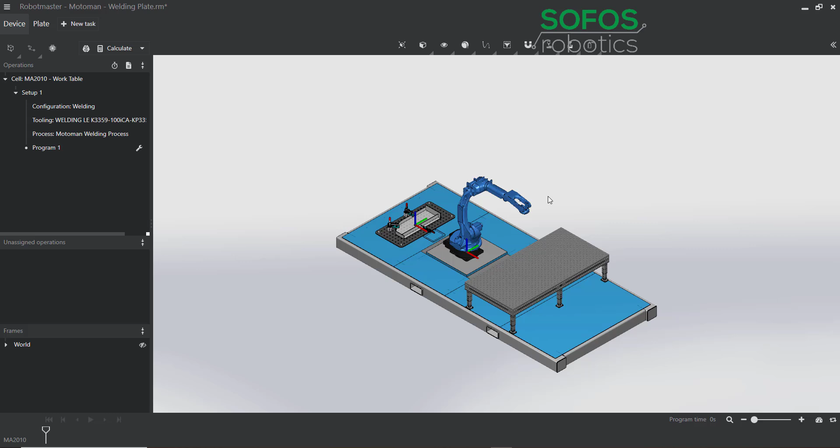Over on my device side, as an example, I'm just going to use this MA2010 by Yaskawa, but this works with Fanuc, Kuka, ABB, UR, all different kinds of robots. And to import this part, I just clicked on this plus icon and it will open up your file explorer and you can go and select your part. Now that I have my part loaded in, I can go ahead and add an operation.

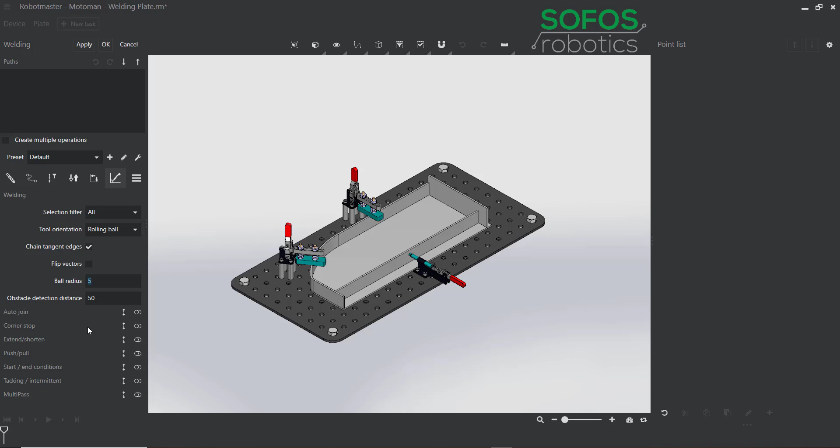And now we'll select welding. When you click on the welding module, you can see that you're going to get these icons across the top here. These first four are common across the contouring module, the surface path module, and some of the others. So really the items that I want to focus on in this video are going to be specific to welding. I'm going to click on this welding icon here, and it's going to bring up this menu with some of these different options that are specific to the welding module.

The latest way that Robotmaster has decided to find joints that I really like is they have this rolling ball method. You can see when I hover over a weld seam, up in the top left corner of the viewport, there's a green ball, and it is finding where the walls of that joint touch it and creating a bisecting angle.

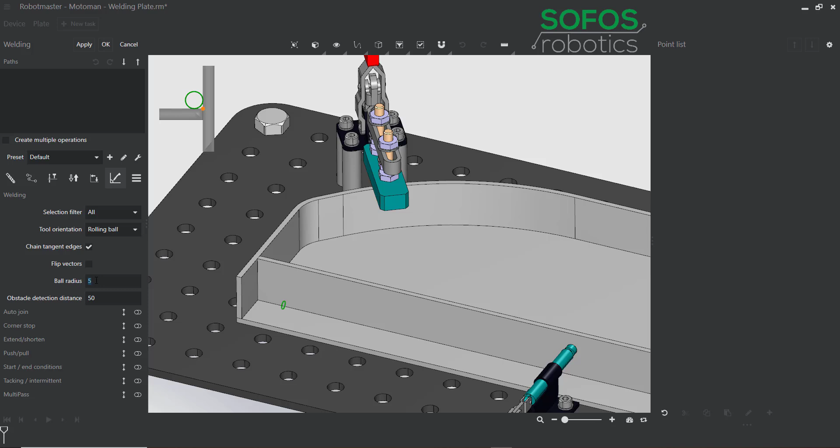And the reason I like this is because you can expand or shrink the ball radius to fit your gap. So even if you have a CAD file where the weld joint has a gap, you can expand that ball radius and it will still find the bisecting angle for that joint.

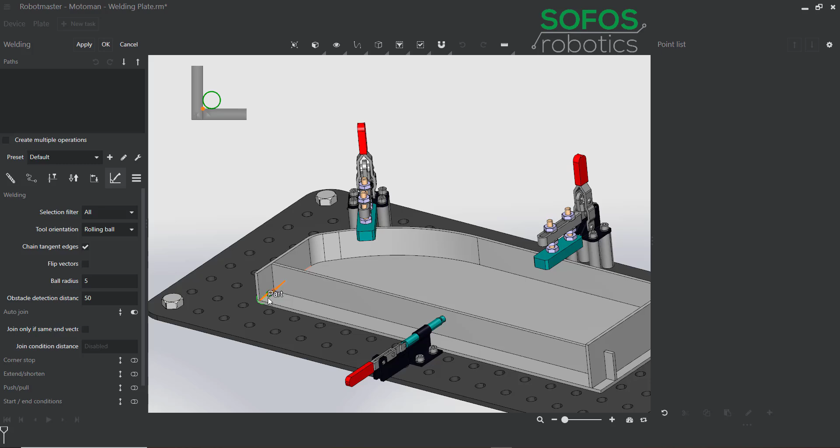From there, I'm going to go down and start showing some of the weld module specific options, starting with auto join. To turn these options on for the path, you just click this toggle switch and then you can expand using these arrows. So for auto join, if I wanted to weld around a corner, like right here, you can see when I first click that path, I have one weld path up here, but then when I add this second path, it adjusts this vector so that I can weld through that in one continuous motion.

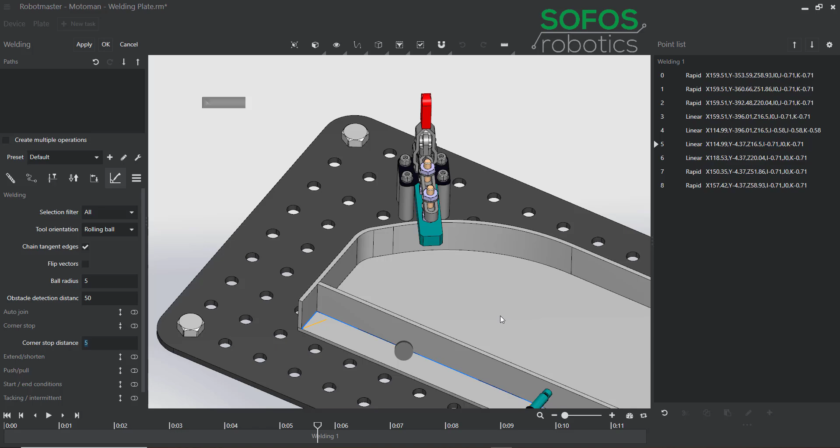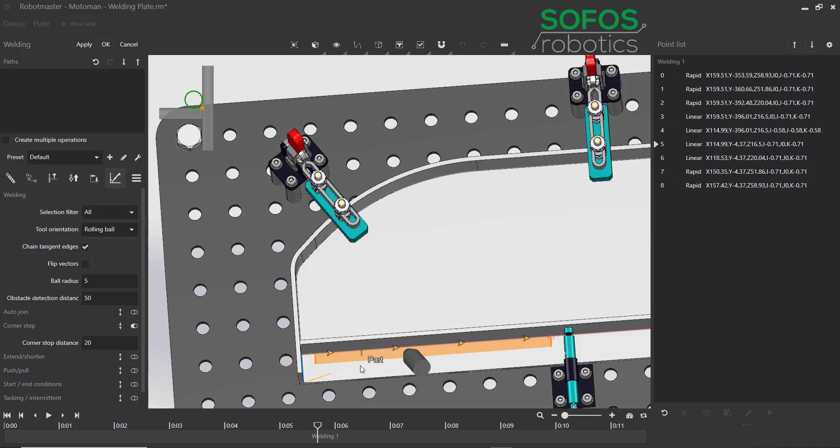After that, we have corner stop, and what corner stop does is it automatically detects the wall here and the clamp here, and then stops the tool path within a certain distance in millimeters. If I reorient before I turn this on, you can see that we're going right up to the wall and right up to the clamp. If I put in a 20 millimeter corner stop distance and turn this on, now it's detecting the wall and the clamp, and shortening the path to avoid those obstacles.

Extend shorten is a more advanced version of the corner stop because it allows you to extend or shorten the path at the start or at the end. So for instance, if I wanted to extend the start, let's say I do 25 millimeters here, and I wanted to make the end of my path shorter, I could do -10. Then you can see at the beginning of my path, it's extending at 25 millimeters, and where the clamp is, it is reducing the path by 10 millimeters.

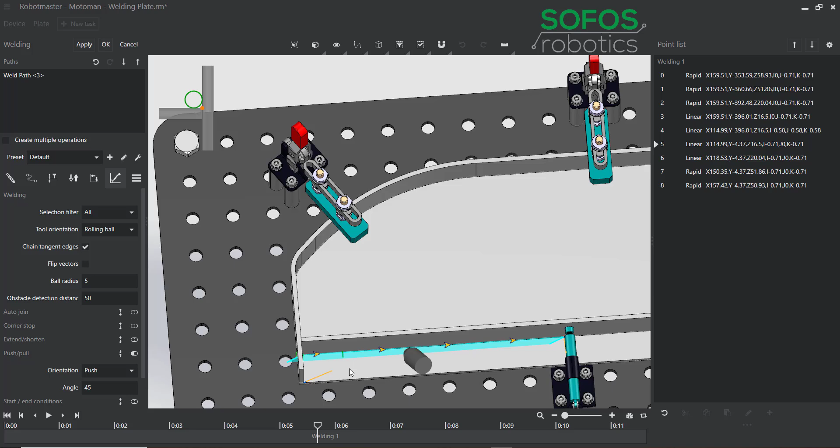Push-pull. This allows me to select a push or a pull orientation as well as a degree for what I want that to be. So you can see here, if I do a 45-degree push and I hit apply, it's going to put that orientation on all of the points in that weld path.

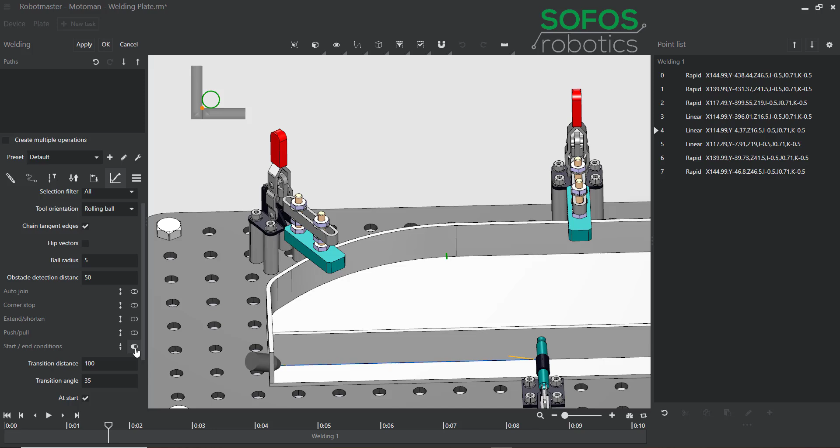The next one we have is start and end conditions, and this is one of my favorites, and it tends to be one of our customers' favorites as well. What this does is it will detect the wall and the clamp, and it will allow the torch to go in at an angle so that we can avoid collisions with the nozzle. So we have the transition angle, which is the angle at which the torch goes into the weld seam, and the transition distance, which is how long it takes to get back to the ideal weld position. If I click apply here, you can see we're coming in at a 35-degree angle, and it's taking us 100 millimeters to get back to this normal position here.

And I can adjust this if I want to get back quicker. I could say 50 millimeters. And then when I program this path, you can see it's going to pop back up pretty quick. And 50 millimeters away from that clamp, it's going to start that sweep as well.

Next we have tacking or intermittent welding. This is broken up into two different tacking modes: distance and fixed number. I'll go through distance first, then fixed number.

I'm going to turn this on to activate it. I'll set my weld tack length to 10 millimeters and the distance in between my tacks to 50 millimeters. Now it's set up to go a 10 millimeter tack, and from the end of that tack there will be 50 millimeters before the start of the new tack weld. If I wanted to use a center to center reference, I could check this box right here.

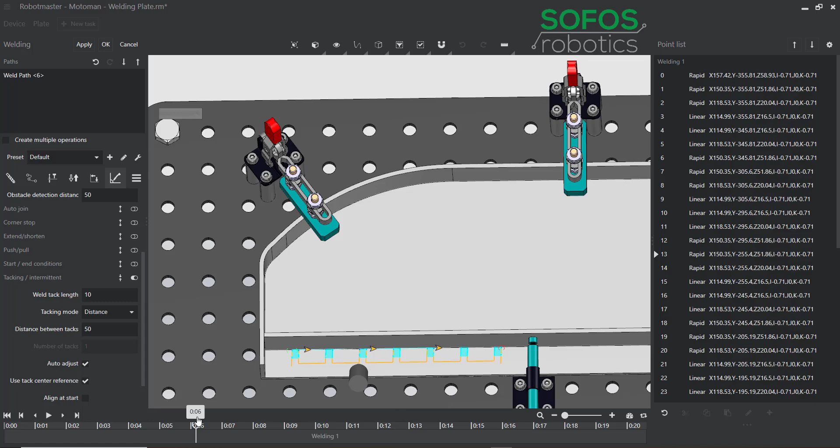One thing I like to show off with this as well is the approach retract. If we look at this weld path, we probably don't need to come up this high in between each pass. There's a menu here where I can specify how many approach and retract moves I want. So let's say I do my clearance move, I'll make that linear, and then I just want to go straight from my clearance into my welds.

So I have an option here to use it only at the start and at the end of the path, so it would be here and here. I'm going to check that. For the weld paths in between, it's going to pull back to this feed height, which I'll set to 10 millimeters. When I hit apply, you can see we have a nice clearance move, and then we're just pulling back to whatever we set our feed height to until we get to the end of the path, and then we'll do the full 60 millimeter retract.

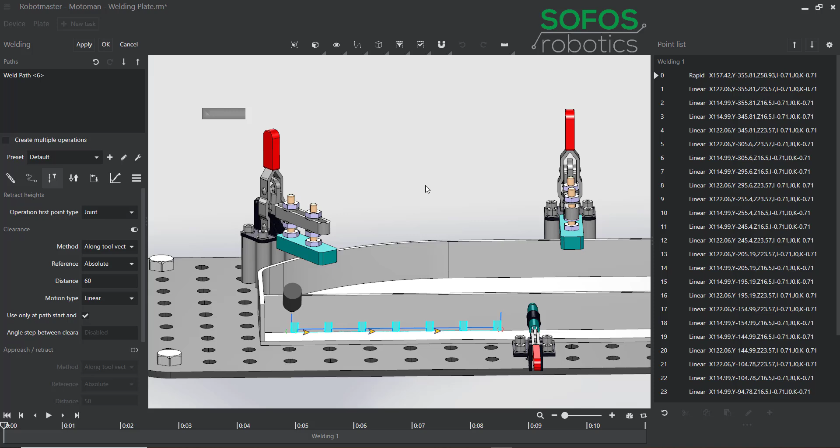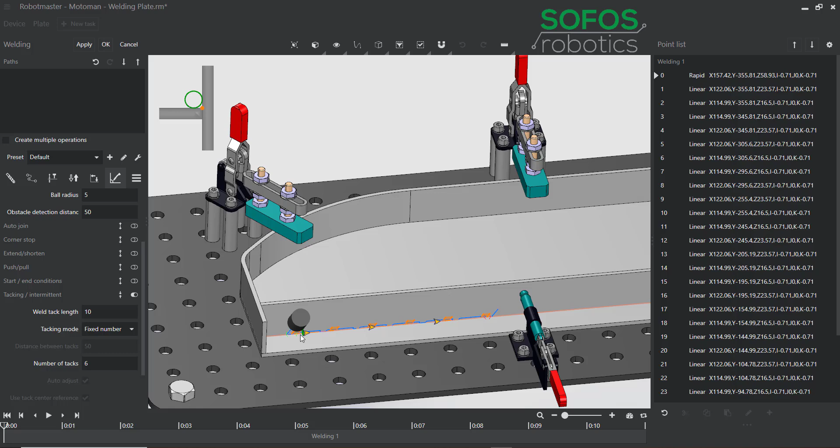So that was distance. Now I'll go over fixed number. Fixed number allows us again to put in a weld tack length and then how many we want. So if we want 6 welds, I can just put in 6, and you can see it's going to give me 6 10 millimeter tack welds there.

Down below I can align these at the start if I want to, or I can align them at the end. I can also make sure that I have a tack at the start and at the end, and it will space them accordingly.

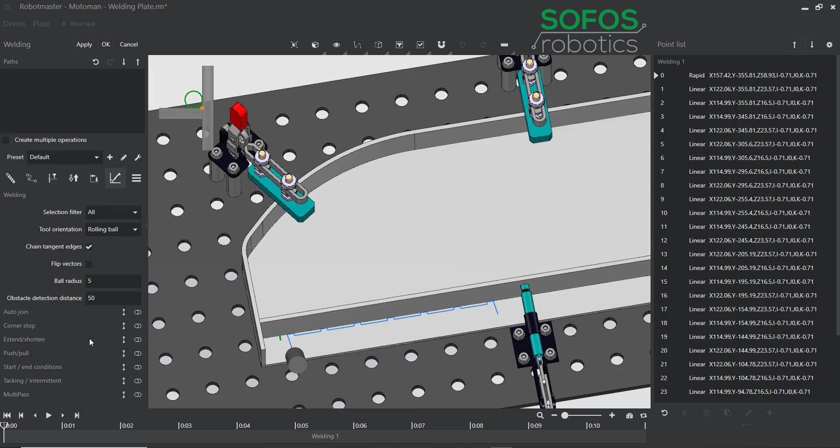After that, we have multipass. The way multipass works is it will program a root pass and then 2 passes on top of that, 3 passes on top of that, and so on as you add layers.

You have a couple different options here. This Z up order indicates, after the root pass, whether we want our second pass to be on the wall of the part or on the floor of the part. Then we have the option to keep the same direction.

What this would do is create the weld, retract, come back to the start, and do the second weld, retract, come back to the start, do the third weld. If we uncheck this, then it would do a zigzag motion where it welds one way, then welds back the other way, and so on.

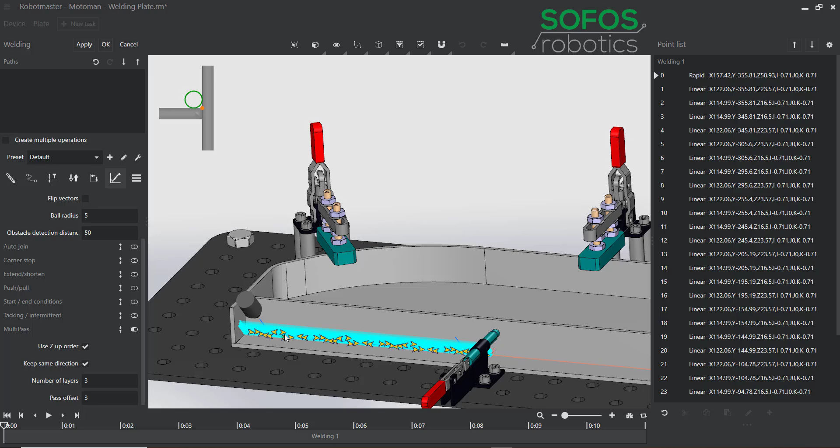The number of layers here determines how many welds this puts down, so for 3 layers it's going to put down 6 welds. If we zoom in here, we can see it's a root pass, then the second layer, which is 2 welds, and the third layer, which is 3 welds.

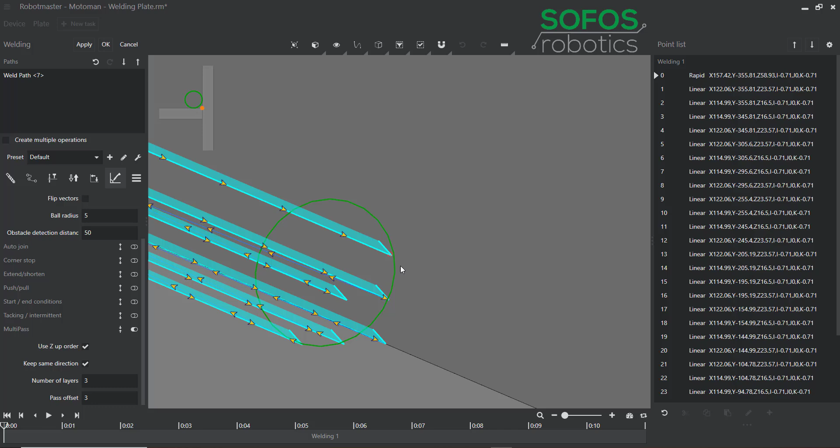The pass offset in millimeters is how far away from each weld it needs to be. So this would be 0, this would be 3 in X, this would be 3 in Y, and that just plays out over the course of the whole multi-pass weld path.

So those are the specific parameters that we can use to program. We also have the auxiliary menu, and this is where we can set our arc start and arc end files, as well as our weaving files. So if we have a weaving file number that we want to call, we can also call that from Robotmaster, and then seam tracking parameters as well. So this will all be natively output from Robotmaster to your robot if you're using these functions currently.

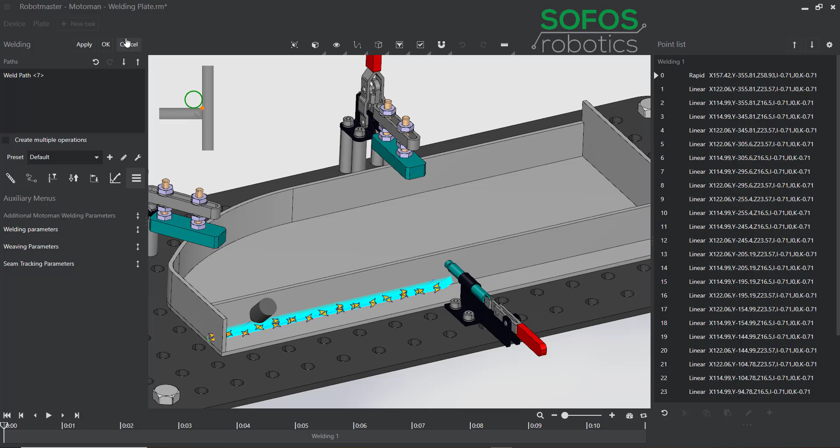The next thing I want to go over really quick is touch sensing. There's two ways you can do touch sensing. You can do it embedded with the weld program. So if I come in here and do welding with touch sensing, it's going to ask me what method I want to use, wire or nozzle, and then the order that I want to do the touches in and how many touches I want to do.

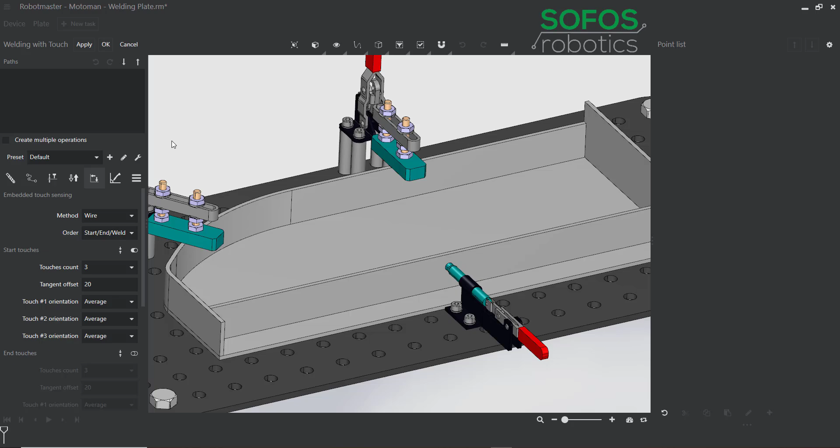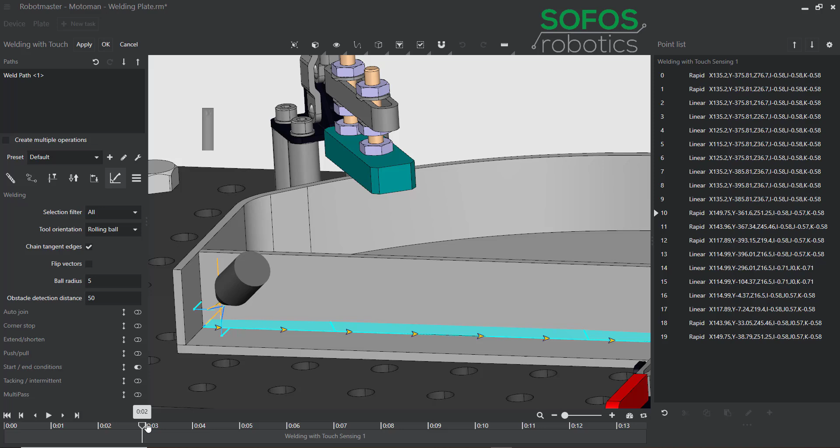So for instance, if I keep it with this same path, I'll turn on my start and end conditions, and you can see when I program this path, it's going to automatically program in those touches as well. It'll come in, it'll touch, touch, touch, and then it'll do the weld. And it'll output these search functions and these offsets for the program as well. So that's one way to keep it specific to the weld.

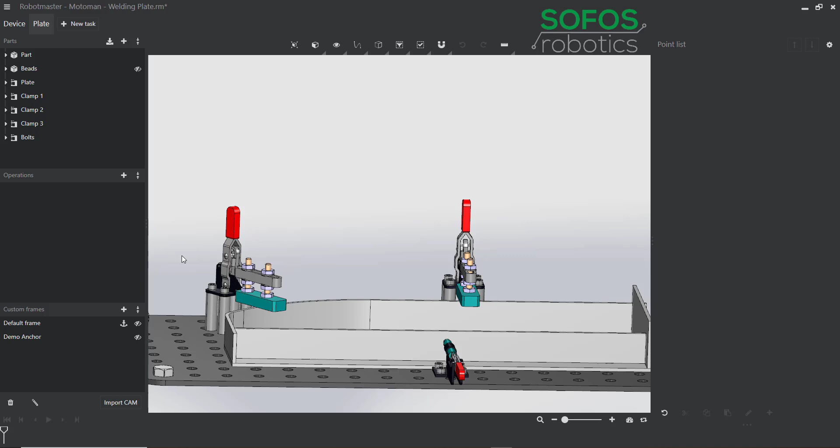Another way I could do it if I wanted a more global touch sense is I could come in here and create a touch sense job. So for instance, I could come in here and touch here, and you can see it's automatically programming in those touches with this distance of 20 millimeters, and it's reorienting those touches.

So now that I have this created, I have a touch sensing 1 job, and when I come in here to open a weld job, I can go to the touch sense option, and I can reference that touch sensing 1 job that we just created. And this would allow you to create one touch sense routine and then take that touch sense job and apply those offsets to multiple different welds.

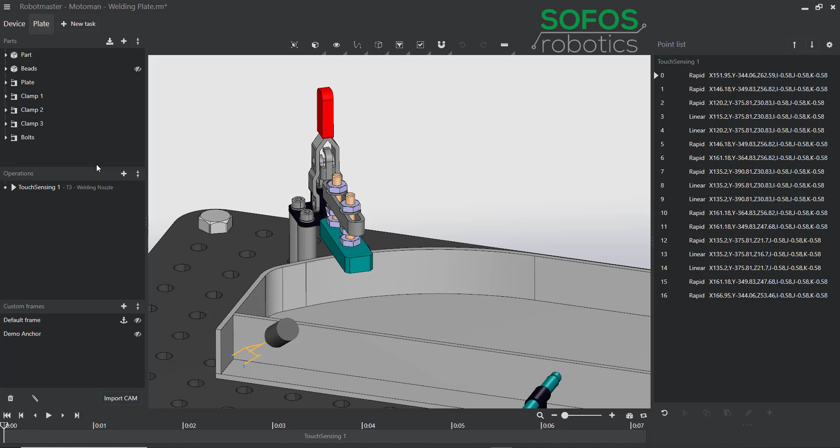So I'm just going to go ahead and delete this, and I want to program this up really quick just to show you what a workflow for programming this part would look like. I'll go ahead and program this weld, and this weld around here.

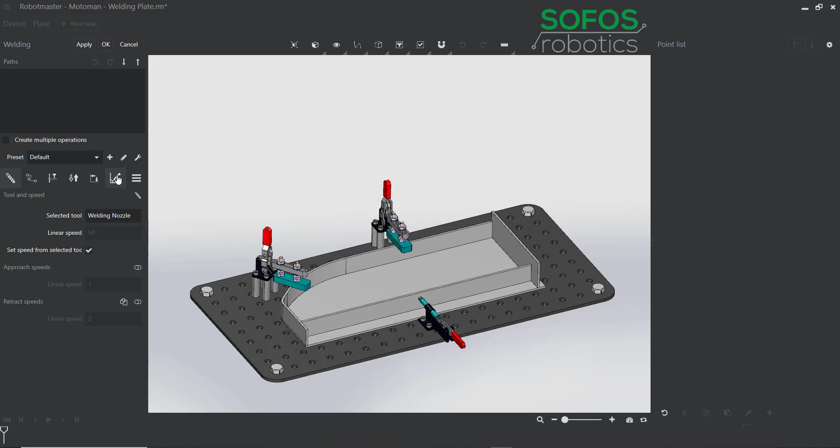So I'm going to go to welding, and for this first one, what I want to do is just use the start and end conditions here. Go ahead and click that and hit OK. Got that weld. I'll do this one really quick with my start and end conditions.

And there's also presets that we can set here. So I could come in here and add start and end conditions as a preset. I have a last used settings, so if I hit override, you can see it's going to use my last used settings here as well.

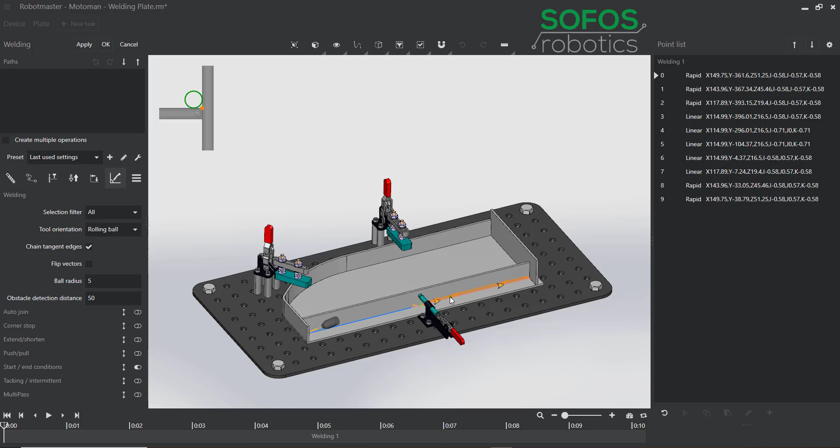And so you can set up presets for operations where a lot of these different welds use the same parameters. So I'll come in and do this weld here, and I'm creating these in separate weld paths so that I can more effectively control the transitions. So again, if I go here, last used, override, now you can see my start and end conditions are automatically checked, and I'll program this weld here as well.

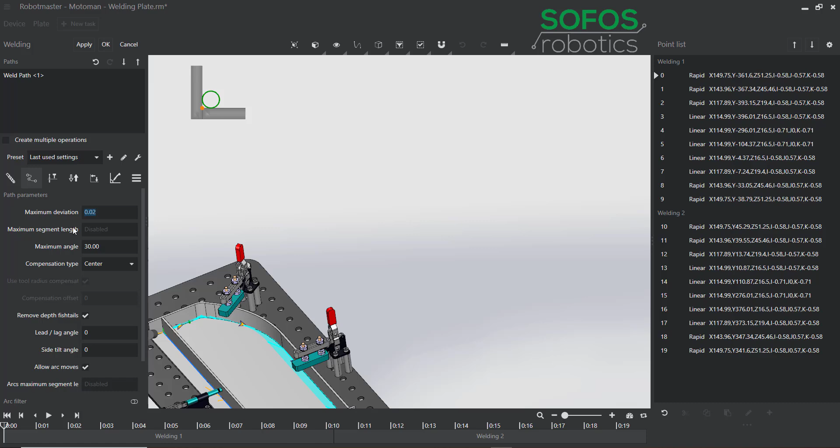And I'll hit apply, and now we have our 3 weld paths, and we can go over into the device side where we can start setting up how we want the robot to move, adding any transitions that we need to, and correcting any kinematic errors that we need to.

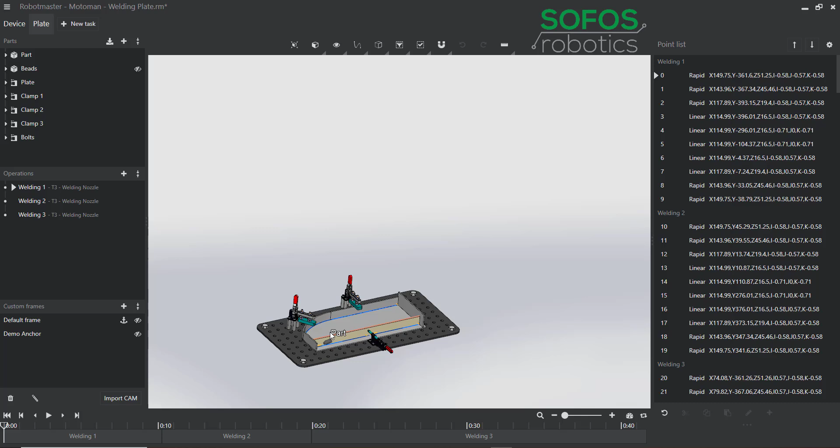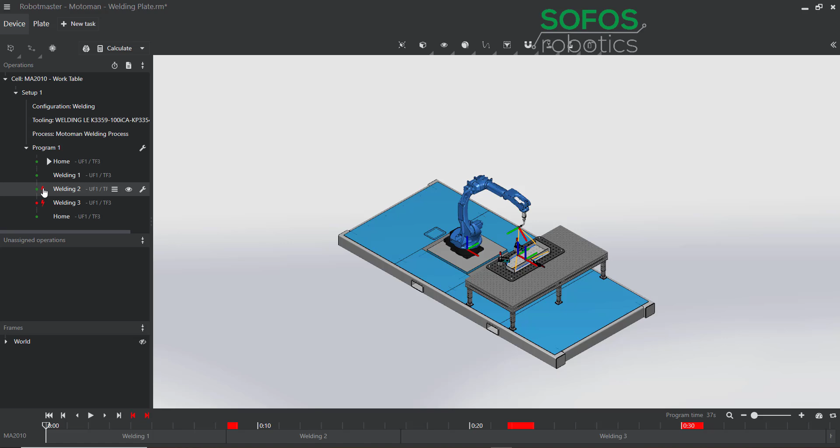So I'll go over here, I'll hit calculate, and you can see we are pre-processing all of these operations. So we know green means there's no kinematic errors and no collisions. We do have a collision, it looks like here. I can just click on it and it'll show me that collision.

Let me hide these tool paths so that it's a little less messy. And then I also have a collision here, so that's my clamp. So I'll work through my collisions first, and we'll go from there. And it's very easy to fix a collision here.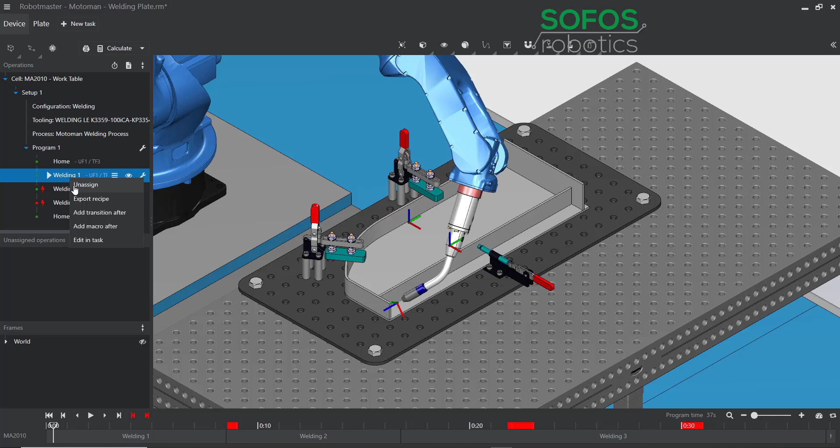So what I can do is right click on weld 1. I can go to add a transition after. I can go to manual transition. Let me delete these. And then what I can do is scroll through, and what I like to do is get this to a point where it's right in the middle of the collision that I'm trying to avoid. Something like this.

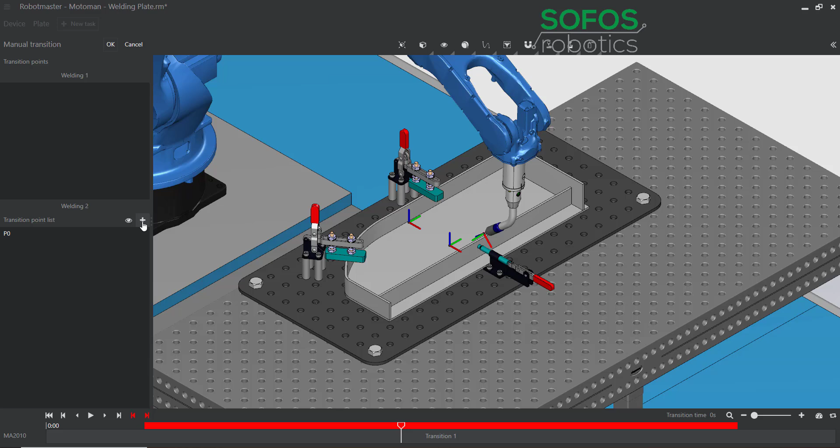And I can click on my torch, and then I can adjust my torch and pull it away from my workspace so that I can avoid that collision like so. I can add that point, and then I can inject that point into my current transition list here.

So I'll click OK. You can see we now have gotten rid of that collision by inserting that point.

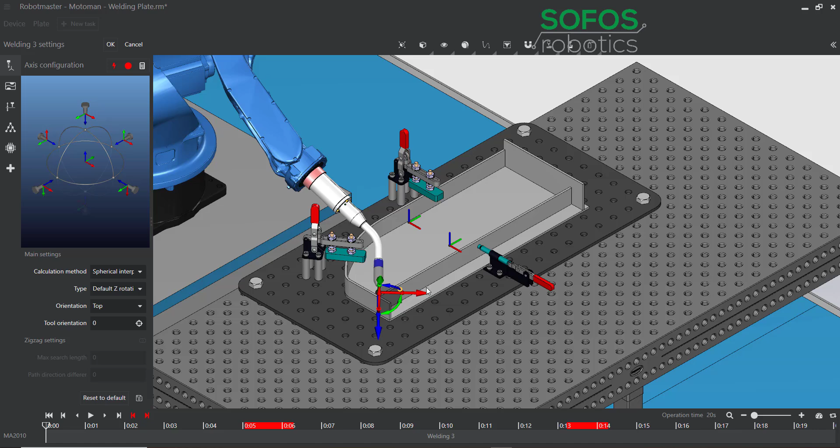And it looks like we have an out of reach here, marked by a red dot. I could set up a recipe for this, or save it as default, but what I want to do is prohibit the torch from spinning around the Z-axis.

So I'd really like that torch oriented like this, and the way I can do that is by locking the Z rotation around my torch. If I go ahead and do that and click calculate, you can see now we have a green dot saying there are no kinematic errors, so I can click OK.

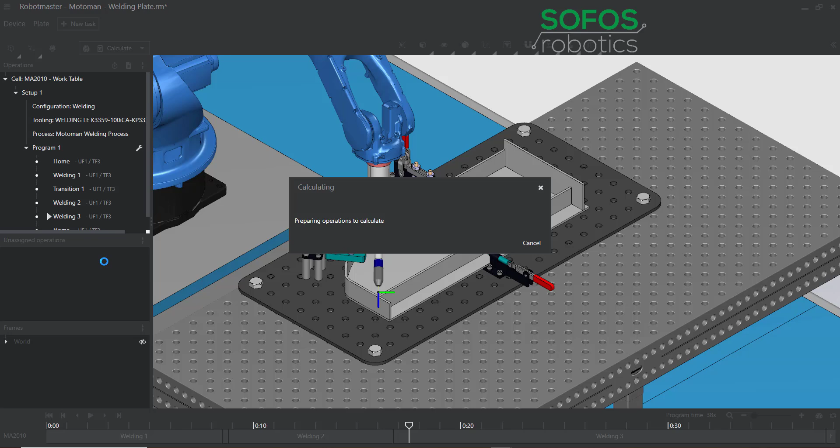Now we can see that we have a collision between the two, but our torch is oriented the way we want. So I'll quickly add a transition point in between these two operations.

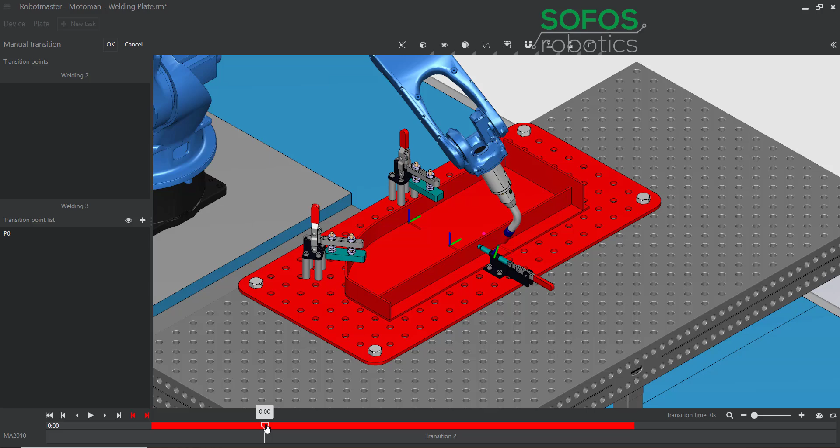I'll do a manual transition and slide it somewhere around here. I can click on my torch and move it out of the way, record that point, and insert it into my transition. So now our transition looks good.

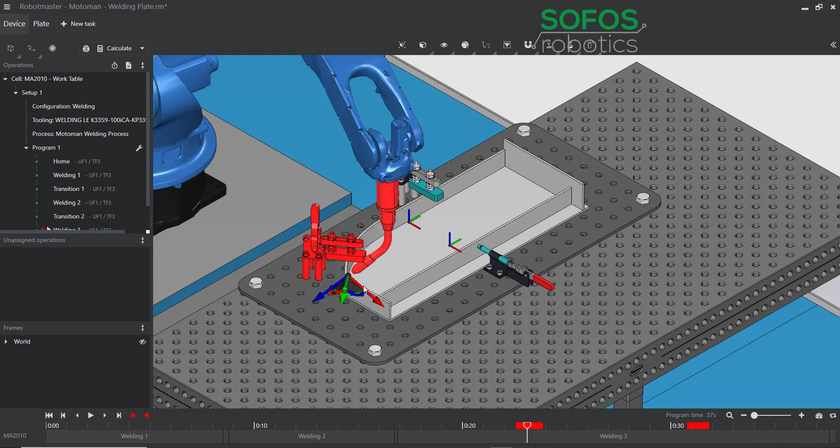Now what we want to do is weld around these clamps. Having experience with robots, I know I can click on my torch and it's going to give me this TCP, this tool frame. I've got blue as my Z-axis, green as my Y, and red as my X. And I know if I can just rotate around that Y-axis, I can avoid these clamps.

Robotmaster has come up with a very clever way to do this, and they call it optimization. When I go into the settings for this weld path, I can click optimization. It's going to default to spinning the torch around the Z-axis, but what I want to do is add a map, and I want it to be that TCP Y we were looking at. So I'll select that, give it a range of 20 degrees, click OK, and it'll be added up here as an option.

You can add up to 3 maps here, including external axes like linear rails or rotaries, whatever you want. You can use these 3 maps to dynamically try to find a solution for your robot that avoids collisions and any kinematic errors. As you update one of these maps, it's going to update the other maps as well, giving you a pathway to error-free programming.

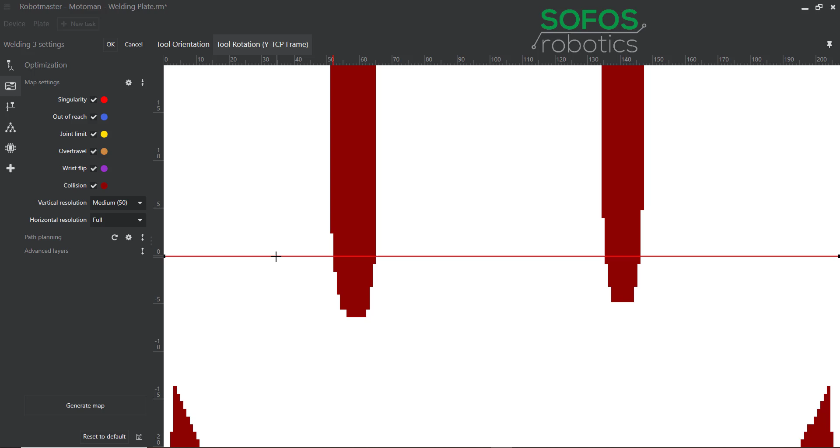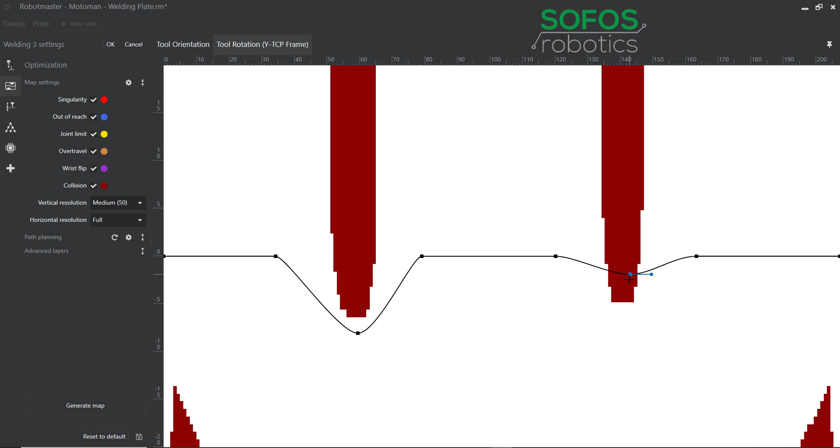When I generate this map, over on the left you can see everything we're checking for: singularities, out of reaches, joint limits, over travels, wrist flips, and collisions. Here's the first clamp, and here's the second clamp. If I move this line around those obstacles, it's going to adjust those paths in that tool frame Y to avoid these clamps. So I can just move this out of the way.

I can click OK, and then when I calculate, you'll see that we're not going to have any errors or collisions on that tool path, because we've added a rotation to that tool as it goes down the path.

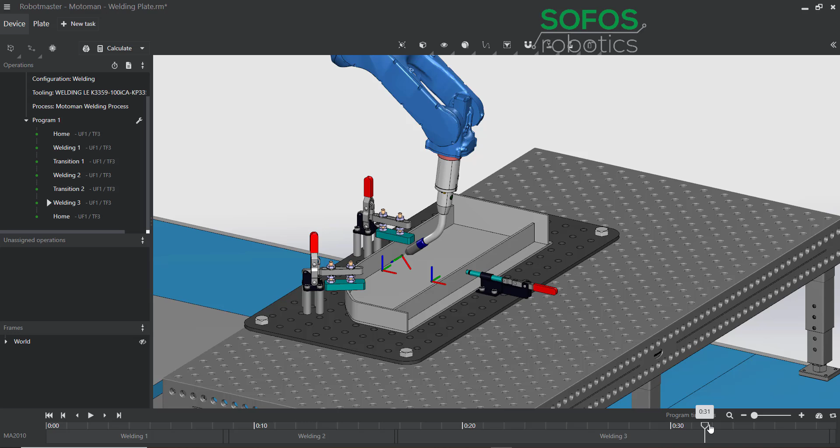So as I simulate through, we'll see that robot dip down out of the way, come back to a normal position, and then as we get to clamp 2, same thing: we'll dip out of the way and come back to our weld position. This really allows you to quickly get through programming parts.

Saving you time, and obviously, if you have another part queued up while your robot's welding, you don't have to take it down. If you have the CAD model, you can program it in Robotmaster, and then when it's time to run this part, switch over your tools, download this to the robot controller, and go.